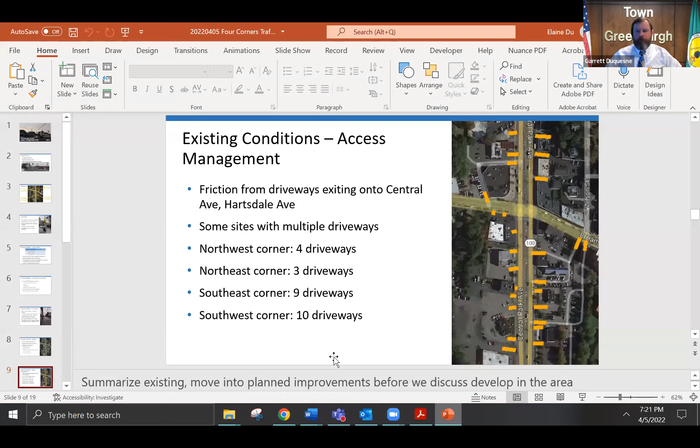Garrett, just a question. If the public emails planning@greenburghny.com or publiccomment@greenburghny.com, will you be able to see those both? Yes, indeed. Both are fine. All right. Thank you, Garrett.

Please let me know when you can see my screen and if it's in presentation mode. All set. Great.

Good evening, everyone. Tonight I'll be presenting the traffic and transportation portions of the Hartsdale Four Corners study. My name is Elaine Du, and I'm a technical director for AKRF.

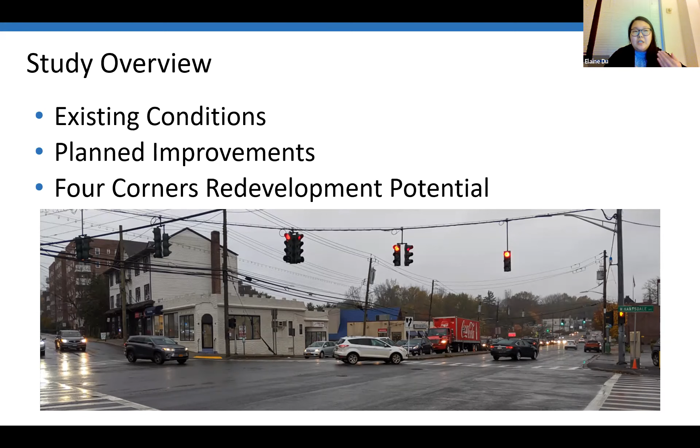In terms of what we'll go through today, we'll first discuss existing conditions, including what's going on at Four Corners today in terms of traffic and pedestrian conditions. We'll talk through the planned improvements that New York State DOT and the town of Greenburgh have planned for the Four Corners area. Finally, we'll discuss the Four Corners redevelopment potential with all of these improvements, including an initial, theoretical redevelopment scenario.

This is the study area we'll be reviewing tonight, which AKRF has reviewed for traffic. Our main study location is the Four Corners intersection of Hartsdale Avenue and Central Avenue. The redevelopment parcels we'll talk about are the northwest corner, the former Duane Reade site; the northeast corner, with the Gyro restaurant, Unico, and a Japanese supermarket; the southeast corner, with IHOP and other restaurants and fitness equipment; and the southwest corner, from Dairy Del down to the Safavieh furniture store.

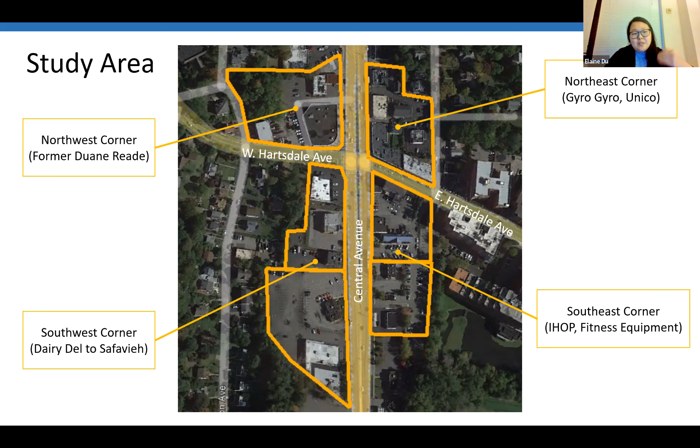The way we started this project was through extensive data collection, collaborating closely with the town. We were out there ourselves in fall of 2019 doing observations and collecting traffic and pedestrian data at Four Corners. In January 2021, we did a site visit with the town of Greenburgh to walk the East Hartsdale corridor, observing conditions and discussing the different traffic signals along the corridor. We also reviewed the Hartsdale Neighbors Association comments issued to the town, and coordinated extensively with the Greenburgh Police Department. Through all of this, we identified various pedestrian and traffic deficiencies, which we'll discuss.

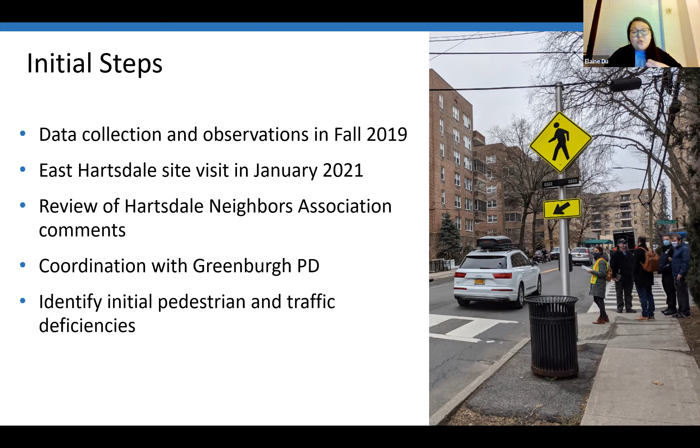To perform traffic analysis, we applied a software called Synchro 10. We use this as a standard traffic analysis software that applies a national standard called the Highway Capacity Manual. Based on various inputs, including traffic volumes, pedestrian volumes, and signal timings, it gives us outputs such as delay and level of service.

Level of service is a measure of how well an intersection operates. It's like a school grade, where A is the best and F is terrible. Level of service A is like free flow conditions—you generally arrive on green and pass through immediately. Clearly, Four Corners does not operate this way today. Right now, it's operating closer to level of service E, meaning you'll experience traffic backups and cycle failure, where you wait at a signal for a cycle or two to pass through. So we know it's not operating very well.

The unique parts of this intersection are that there are a lot of pedestrians crossing here, and it's subject to various Metro North peak hour surges with trains coming in and commuters passing through. As a result, we see significant queues and delays. In the eastbound direction, West Hartsdale, the queue has been observed extending past Washington Avenue and even to Hillcrest Road. In the westbound direction, East Hartsdale Avenue, the queue can extend past Wilson Street and sometimes to Columbia. In the northbound direction, the left turn queue spills back pretty far, sometimes all the way to the BP gas station to the south.

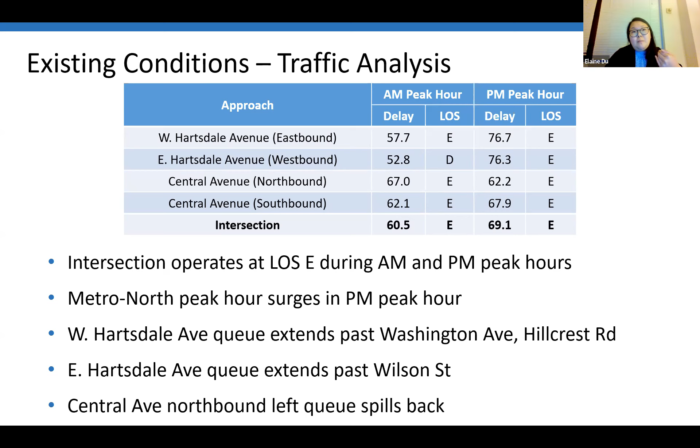In addition, we looked at safety at the intersection, analyzing the crash history at Four Corners. We reviewed a 3-year period of crash data, from 2016 through 2018. During this time, 96 total crashes occurred at the intersection, equivalent to about 32 crashes a year. Out of all these crashes, 31 injuries occurred, including 8 serious injuries. We noted that the crashes were primarily rear-end and left-turn crashes.

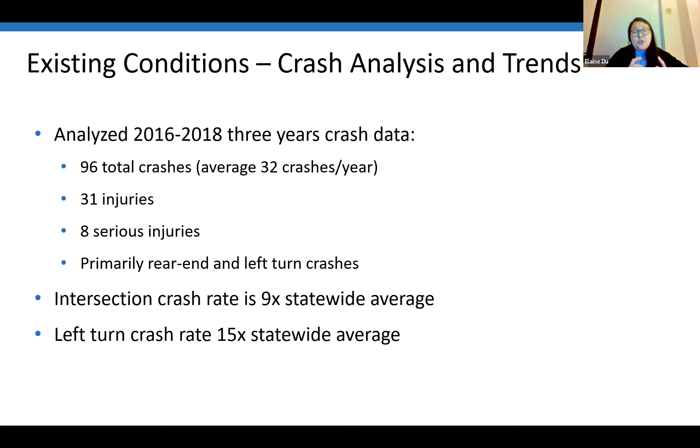These are primarily attributed to things like delay. One thing we noted was that the traffic conditions and backups at Four Corners could potentially be leading to these safety deficiencies. The intersection crash rate was 9 times the statewide average for a similar intersection, and the left-turn crash rate was 15 times the statewide average compared to a similar intersection.

In terms of pedestrians, there is an exclusive pedestrian phase that pedestrians actuate by pressing a button and then crossing. This is when all vehicles are stopped to allow pedestrians to cross any crosswalk. Especially during peak hours, because there are so many pedestrians and commuters at the intersection, this exclusive pedestrian phase is activated for most of the peak hour.

Some pedestrians cross without the walk signal, which is something we observed when we were out there, but it varies. This exclusive pedestrian phase does take up time from the intersection and may be detracting from traffic conditions. However, based on our conversations with the town and New York State DOT, we do not recommend removing this exclusive pedestrian phase, particularly because we want to maintain a level of pedestrian safety.

We also noted various conditions such as narrow sidewalks along East Hartsdale, which you'll see on the right-hand side - that is the north side of East Hartsdale. Although it's compliant with ADA, it's still narrow and not what we would want for a walkable, transit-oriented development.

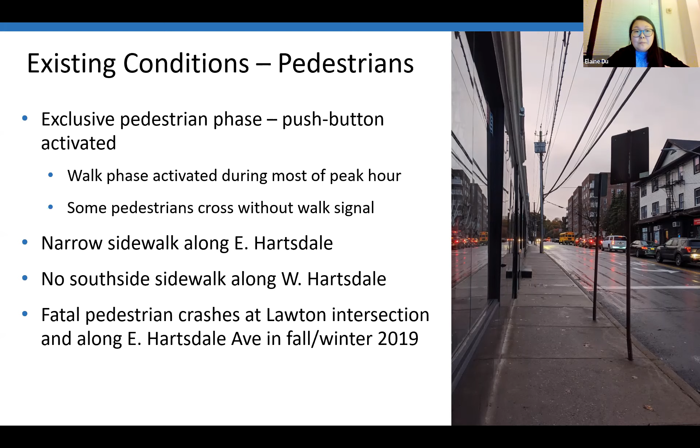However, these spaces would not be able to support a level of growth that the town wants to see for Four Corners.

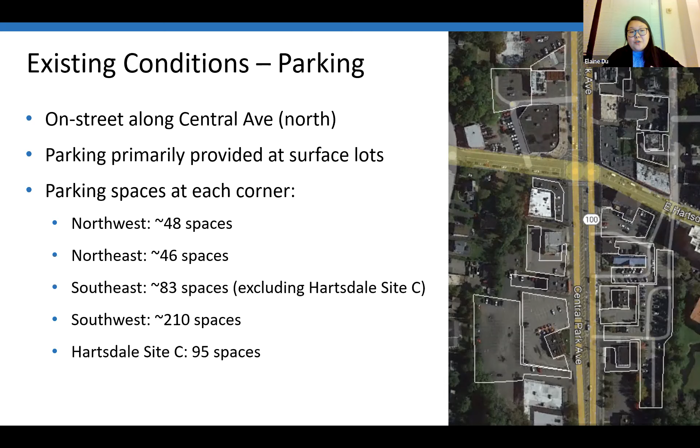Because there are so many driveways, and so many close to the intersection, vehicles will experience friction from these driveways that exit onto Central Avenue and Hartsdale Avenue, which can lead to safety deficiencies as well as traffic operational issues.

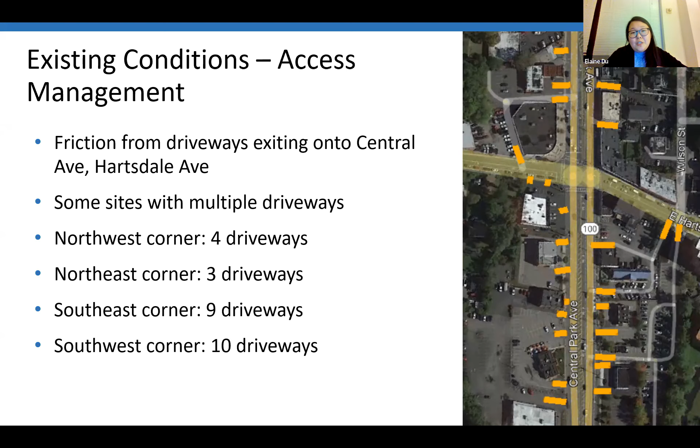So from this, we've talked through the traffic conditions and that we know Four Corners does not operate well today. We've talked through safety, and that the traffic operations of Four Corners and various geometric deficiencies could potentially be contributing to safety issues at Four Corners. We've also talked about pedestrian issues, parking, and access management.

From all this, we build into planned improvements - what the town and DOT want to do to improve Four Corners, even without development in the area. As Garrett already mentioned, New York State DOT has various improvements planned for this area, including traffic signal upgrades. They're adding new detection, which will make the intersection operation more reliable.

We understand that a few years ago, the West Hartsdale loop detector failed in the past, which led to backups and various traffic issues, so with detection upgrades this is less likely to happen. There are also signage improvements for the intersection, which will make it easier for drivers to pass through, and various pedestrian improvements such as curb extensions and ramp improvements that will better allow pedestrians to travel to and from Four Corners.

In addition, New York State DOT is planning to relocate the northbound Beeline bus to the far side of Central Avenue. The bus stop currently is right here, and New York State DOT plans to relocate it north to here.

In addition to what DOT has planned, the town of Greenburgh also has a HAWK signal planned for Lawton Avenue. A hawk signal is a pedestrian hybrid beacon, a traffic signal that's really just for pedestrians. A pedestrian would push a button, it would change from green to red and stop all traffic for people to cross, really improving pedestrian safety for this area.

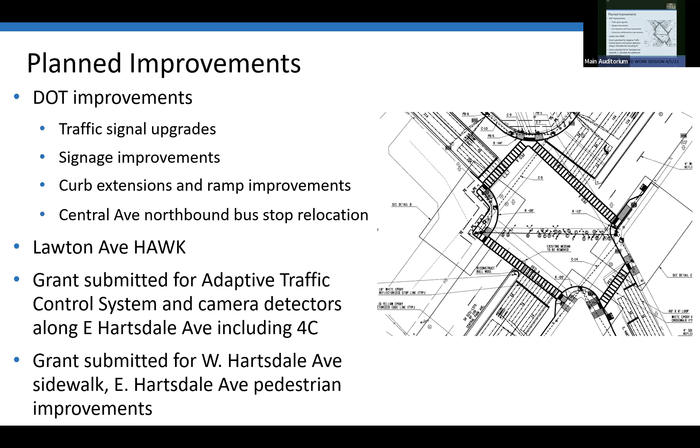I don't disagree. Could I suggest we hear the presentation first, because a lot of people are watching this, and if we're going to send it to the state or anybody else, it would be helpful to get it all on the record tonight.

It looks like there are federal funding opportunities that might be applicable as well. Megan had sent out the email.

Another idea was adding a turn pocket on East Hartsdale Avenue, which isn't feasible today since there's existing development there. In that case, redevelopment would be able to provide this opportunity.

However, we're not certain if a developer would have the appetite to do this, so to be conservative, we didn't include this westbound turn pocket from East Hartsdale Avenue in our analysis — just to be conservative and model what is possible.

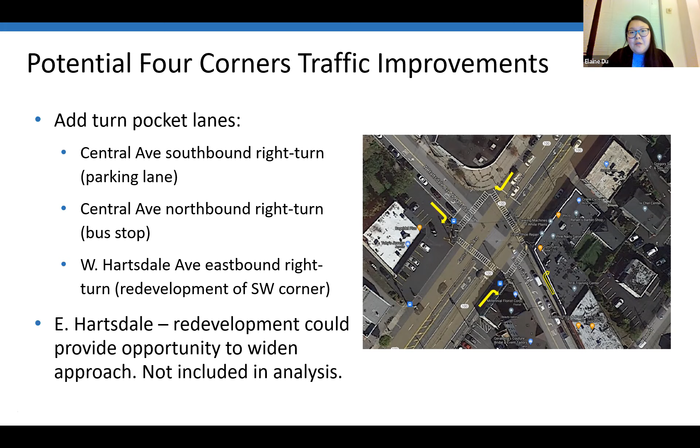To examine the redevelopment potential, going through the process from the beginning, we collected a lot of data and collaborated extensively with the town and various stakeholders. We reviewed existing conditions for traffic, pedestrians, parking, and access management.

We looked at what's happening at Four Corners in the background, as well as what we could do to improve traffic so that development could occur here.

From there we developed an initial development scenario — we won't present this today — which was the maximum possible development in line with the zoning code. From there, we ran several iterations and analysis for various scenarios.

We got to a point where we developed this final theoretical development scenario. I don't want to call it final, because a developer could still come in and change things, but it's a scenario with an acceptable level of development to the town while still maintaining traffic conditions comparable to or better than today.

The theoretical development scenario includes approximately 450 dwelling units across all parcels, and approximately 60,000 square feet of commercial, retail, restaurant, and office space, through all of these corners. We split up the south corners, which are pretty large.

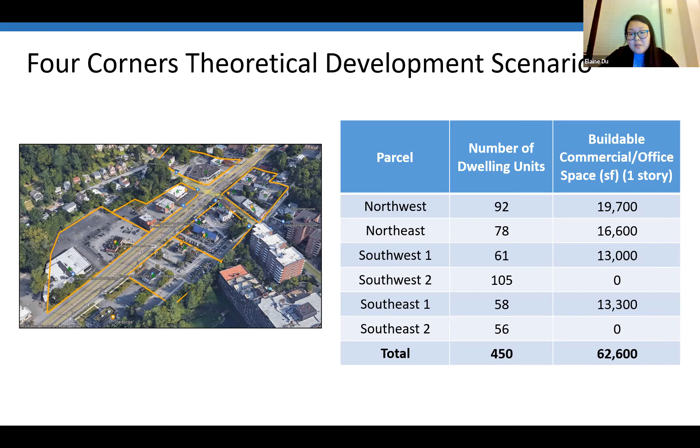This is just to show you what our theoretical development scenario is in terms of how much development there is. To summarize, it's approximately 450 residential units, 60,000 square feet of commercial, retail, office space, and this would equate to approximately 4 stories.

We took this development scenario, estimated how many trips could be generated through this redevelopment, and added it to our traffic network. From this, we were able to get results, which include the improvements we discussed before: the turn pockets, the adaptive traffic control signal system, and all these improvements.

On the left-hand side here are the existing conditions we discussed before, where everything is operating at a level of service E, which is not great. However, with the theoretical development scenario and all of these improvements, we were able to experience some level of improvement at the intersection. We're operating at a level of service D in the AM peak hour, which is acceptable for downtown, central business district locations. In the PM peak hour, although we still operate at level of service E, it's better than what we have out there today.

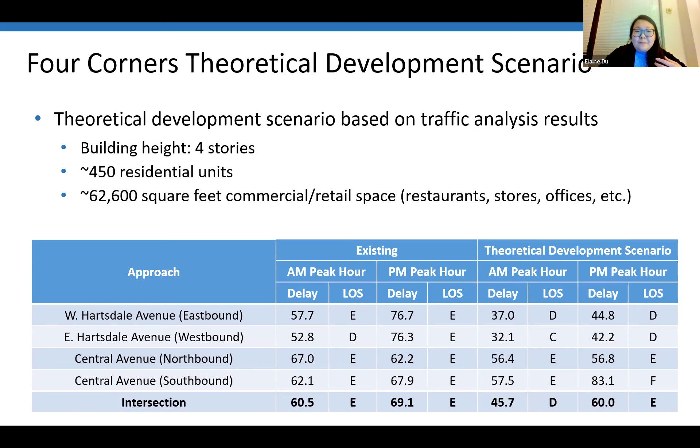In terms of parking, we understand that in order to better serve what's going to be out there in Four Corners, there needs to be more parking to support all of the residential and commercial development. So based on parking requirements that are supportive of transit-oriented developments, we were able to develop a general parking requirement for each of these corners.

It totals to approximately 900 spaces. What we envision is multi-level parking garages that are consolidated for each corner. These parking garages would not be viewable from street level like most downtown areas. Instead, they would be screened, so you would have commercial and residential space, likely more commercial space, around these parking garages. You access them from the back, and out front where you walk on the sidewalk, all you see are the stores.

The other idea we had is that we need to maintain and potentially expand the Hartsdale Site C parking lot that is under the Hartsdale parking district, to better serve all the residents and commuters of this area. Additionally, 900 parking spaces is a lot, so some other items the town could consider are allowing various credits to reduce the parking requirements, such as shared parking credits and lowered requirements for various land uses.

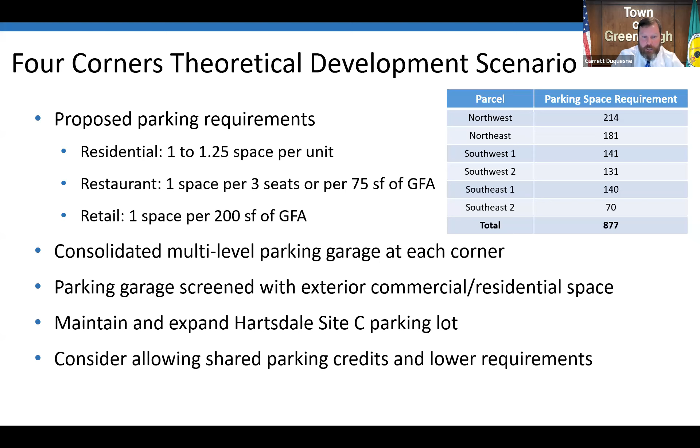I did want to note that in other municipalities we've worked with, in which developers buy public lots, we've seen them also have contracts to give a certain number of parking spaces back to the municipality. So there are options, and like Garrett said, there are different possibilities to see what the developers envision.

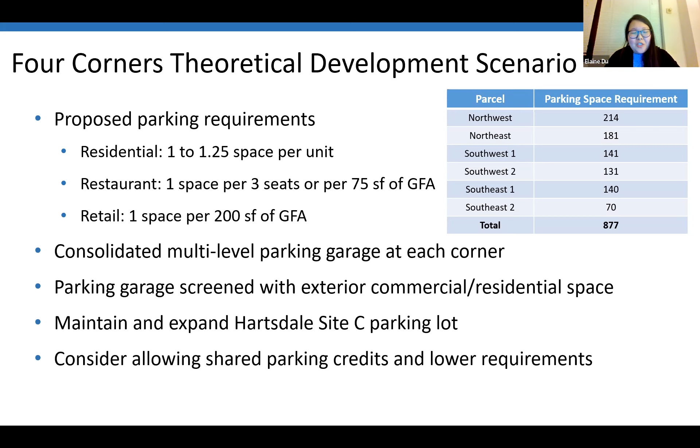So in addition to new parking lots to better support Four Corners, we also envision improving, consolidating the 20+ driveways down to only a couple of driveways. This really helps with reducing traffic friction along Central Avenue and along Hartsdale Avenue.

These driveways would be a combination of both full access driveways, which allow both left and right turns, or right in, right out driveways, which DOT is pushing more for in terms of private development.

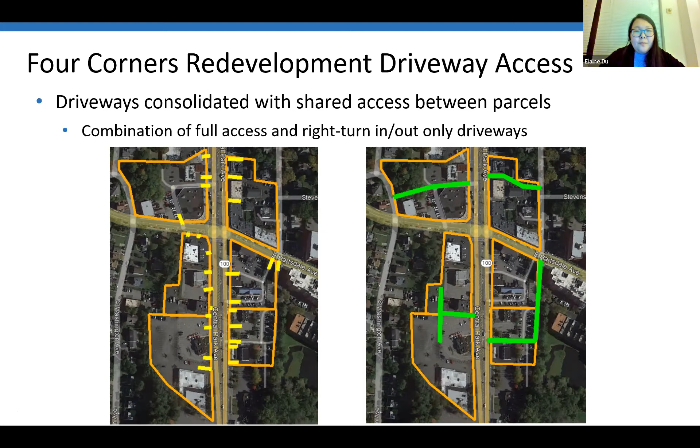Finally, we understand that there's a very strong need for safety and pedestrian improvements in the area. A few things we suggest are various signal improvements, like reflectorized backplates for all traffic signal heads. I'm sure you've seen these when driving around, whereas this is kind of a naked traffic signal. A reflectorized backplate is like a yellow plate on the back so you can see it outlines the traffic signal.

It really highlights the signal for drivers to alert them better to the signal that's there. Another idea is having lane line extensions, which are the dashed lines in the middle of an intersection to show vehicles where they need to go, and it really delineates space for particularly left turning vehicles. We've heard all the complaints from the Hartsdale Neighbors Association. Roadway lighting improvements are needed along East Hartsdale Avenue for vehicles.

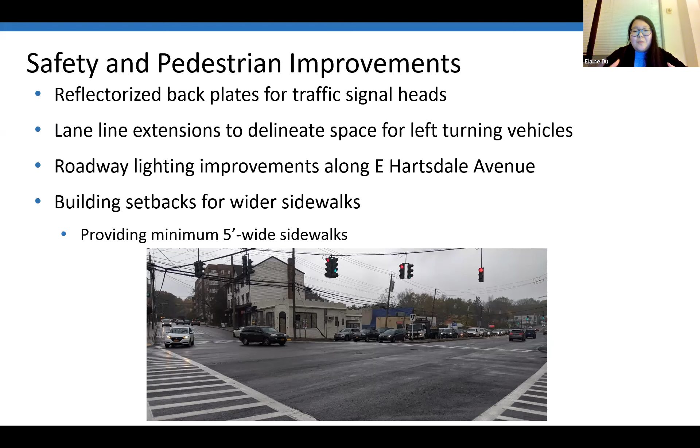In order to improve pedestrian conditions, buildings at Four Corners, the proposed redevelopment, setbacks should be pushed back in order to provide wider sidewalks for pedestrians. 5 foot wide should be the bare minimum, but 8 foot wide plus is really what we need for a better, more walkable area that is conducive to transit-oriented development. This could really help Four Corners be what it could be for the town.

At this point, I don't believe we're taking questions, but I think I'm passing it on to Justin. What I think might make sense is to turn it over to the town board for questions before we get to the stormwater component of the presentation, if there are any questions. I haven't received any questions via email from residents to date.

So all these recommendations, most of them you would recommend that we wait until it's redeveloped, and how many could be done before there's a redevelopment proposal? Yeah, that's the main thought, that these various developments could be tied into improvement to the redevelopment in the area. So like I mentioned before, each corner would be responsible for their own set of improvements, but I'm sure Garrett could elaborate further.

So the types of improvements that really are challenging to make now are things like driveway consolidations. There's really minimal scenario where a driveway consolidation can happen at present. I do believe the turn lanes, I don't see the motivation of a private property owner to make them at this time.

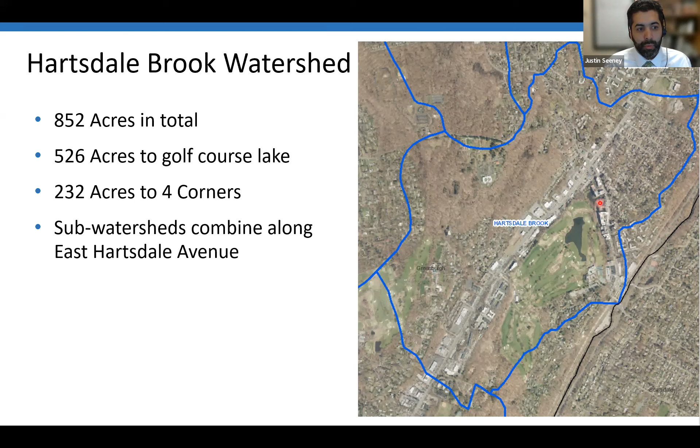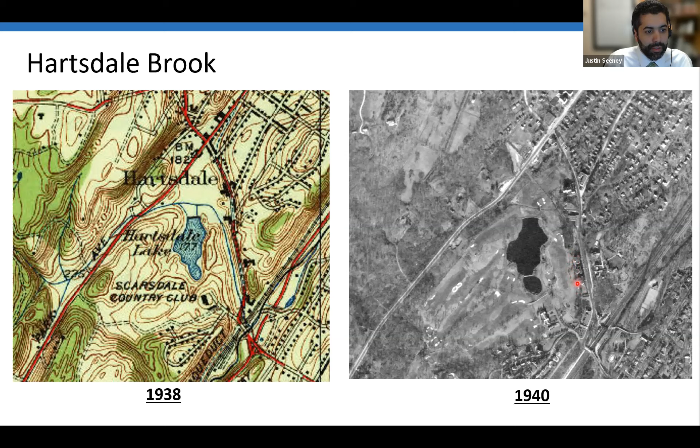By the middle of the 1900s, you start to see legs of that stream disappear. You start to see the first buildings pop up here on East Hartsdale Avenue. The stream was still an open channel at that point. You can still see the remnants of that open channel in the rear yards of these three buildings. And then by the 60s or 70s, both from an aerial standpoint and from the USGS standpoint, you can see that stream disappear from the map. That's combined with significant development that has happened along East Hartsdale Avenue.

And like we'll talk about in a minute, pretty extensive culverting and burying of that stream in pipes, which are quite frankly just substandard.

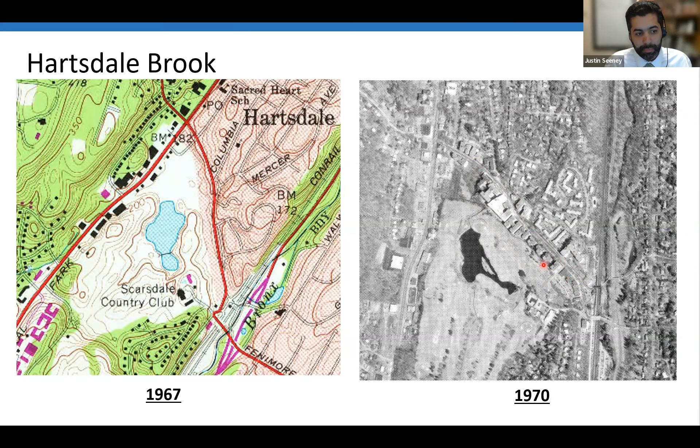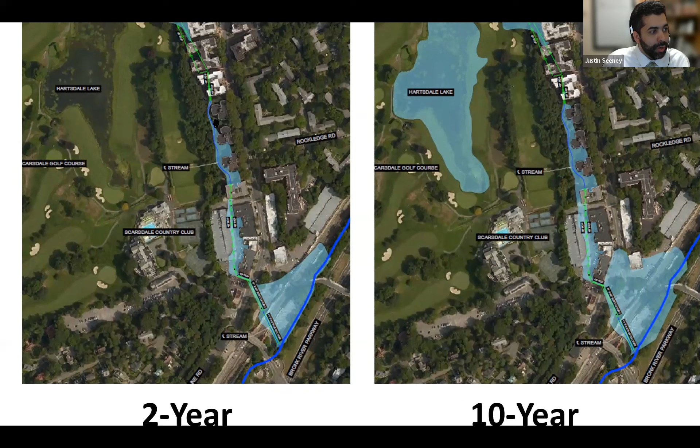In addition, we've tried to calibrate this analysis with input from the communities and property owners in these areas. What we're seeing in our model, backup behind these buildings on East Hartsdale and in the rears of these other East Hartsdale buildings, is very much consistent with the lived experience of these property owners.

So to that end, we recognize there's a need to address conveyance. If we go back to that pinch point analogy, we're at a very small amount of capacity given the flow that we're experiencing.

To solve that 100-year event, to solve that ultimate storm on the scope of Ida, is quite an undertaking, and I'll show you some slides on what that looks like in a minute.

In the interim, there are opportunities that can really provide relief for this 2-year storm event, which is about 3.5 inches in a 24-hour period. Just for some relative perspective, in many years 3.5 inches would be the most rainfall that fell in a 24-hour period for the year. In other years, it's dwarfed by larger storms, much like in 2021 or 2007.

But the aim here is that we are providing options that can provide some amount of relief for those 2-year events, so these frequent instances of inundation can be lessened in frequency, while acknowledging that those solutions do not eliminate vulnerability to larger events. The only way to get there is with a much bigger fix.

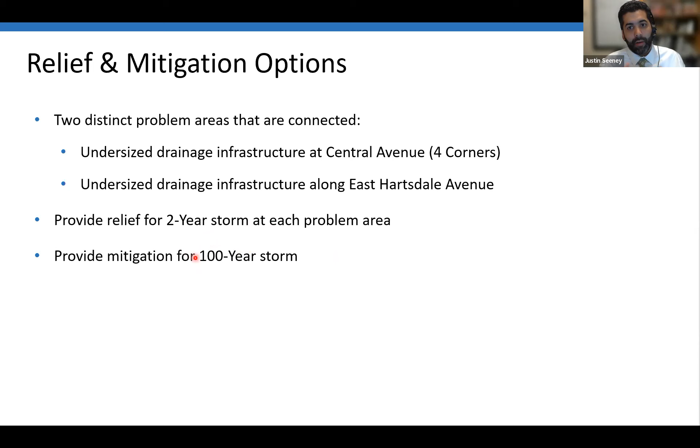So looking at this in stages: Central Avenue, at Four Corners, Fountain Diner, Starbucks, and the furniture store. The 2-year flow of that 200 or so acres is about 200 CFS, and the existing capacity of the system is about half that.

The other challenge we're dealing with here is a topographical one. From an elevation standpoint, this elevation is at about 176. The water level in the golf course pond is around 176. The water level down by the parking garage on the eastern side of East Hartsdale is around 176. So there's very little topography to bridge the water course from point A to point B.

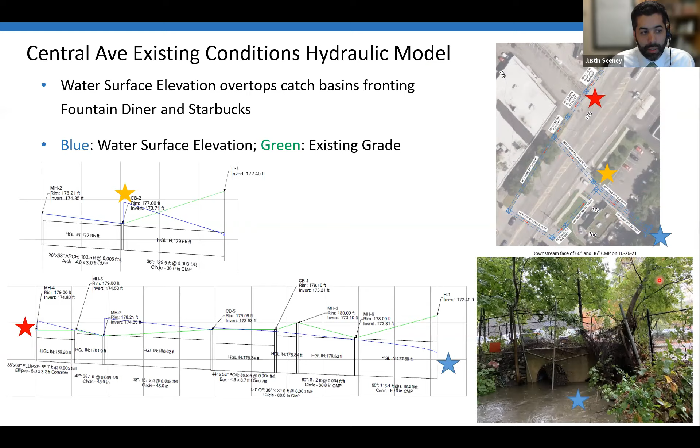So the first solution to address that, from a stormwater standpoint, is relatively small, but again, 3.5 inches in a 24-hour period is still quite an event.

A series of box culverts in that similar alignment could convey that stormwater and get it out of the Four Corners intersection. The pro to this is that it's an improvement that can be readily enacted to provide real-time relief for these frequent events. The con, as I've said, is that even with this solution, those larger storm events still present levels of vulnerability.

What's the cost of that? The order of magnitude - and again, we've done only very conceptual level designs for this - but the order of magnitude was around the $4 or $5 million range, I believe. For option one, this would be the temporary fix at $4 million.

Say that one more time. I'm saying this 2-year relief effort that you said isn't really going to solve the problem - that's a $4 or $5 million budget item. Correct. It's still a considerable amount of work. It's quite a bit of infrastructure, but we are also dealing with quite a bit of flow.

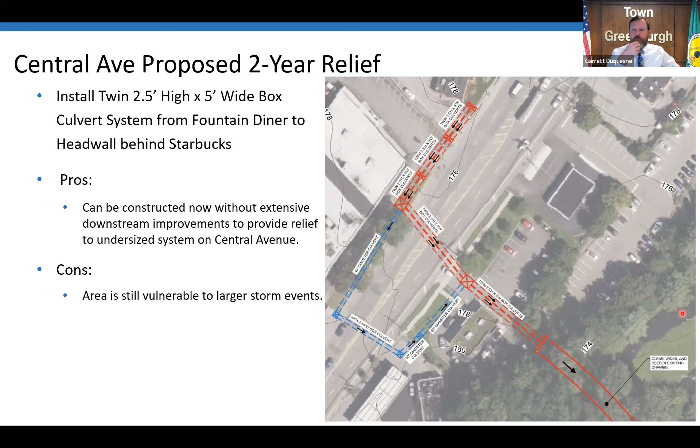So again, we ran this scenario through the modeling software, and ultimately what you start to see - that blue line representing that water surface elevation - is kind of safe conveyance of that 2-year storm event, obviously providing a benefit as compared to existing conditions for those larger year storm events.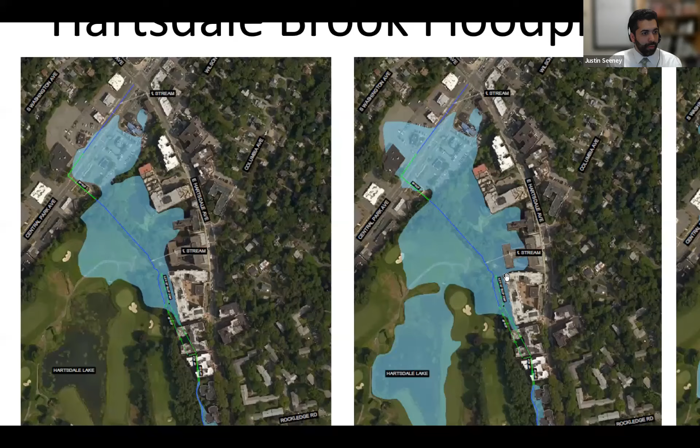Part of the reason we looked at that 2-year storm event as the baseline - and I'm just going to slide back a few slides, I apologize - is in this 10-year storm, which is on the right, the backup that happens here at Four Corners is more really a function of that pinch point. So there's very little you could do here at Four Corners to get the water out without doing extensive downstream improvements to this infrastructure behind the buildings. You could put 6 barrels of pipes in instead of 2, and the driving factor would be that backup of the flow from the pinch point here.

So that's why the 2 years. It seems to me that we have to address the garbage and debris that's collected in these culverts as well - we can't just say that garbage and debris irrespective, the pipes are too small. So have you been able to ascertain to what degree the garbage and debris currently clogging these pipes exacerbates the damage? Yes, I mean, we know that...

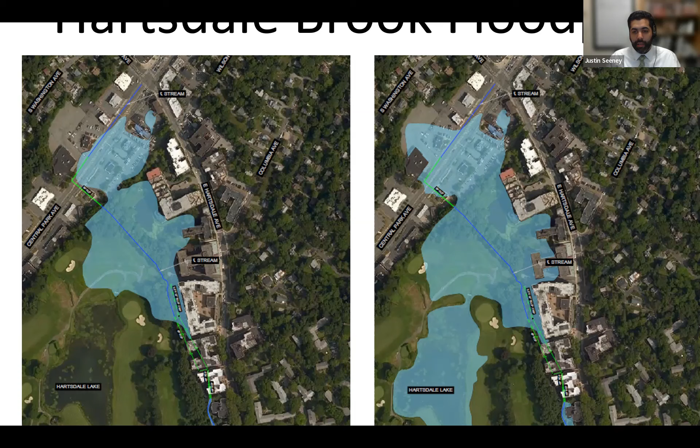We've done an extensive amount of TV inspecting of these different lines, in tandem with some of the Central Ave sidewalk work that has happened in recent months, and have been able to observe blockages and debris.

The analyses that we've completed are all kind of assuming that the pipes are clean and clear as a baseline, because that's a reasonable point to get to. And alongside Rich Fond from DPW and Garrett, we've all had discussions about the best framework to enact maintenance of these lines to ensure that they are clean and clear, both from the property owner standpoint and from DOT.

So we're aware of the blockages. We're aware of some corrective actions that have been taken over the course of the last several years. I know there's a concrete blockage down here at the parking authority. I know there's a pipe here crossing Central Avenue that was pretty extensively clogged. So it's slowly being addressed. But I think the framework for continued maintenance of those is just as important as any design solution.

But is it fair to say that one should begin by cleaning everything out? Yes. Okay. So again, this solution would provide for that.

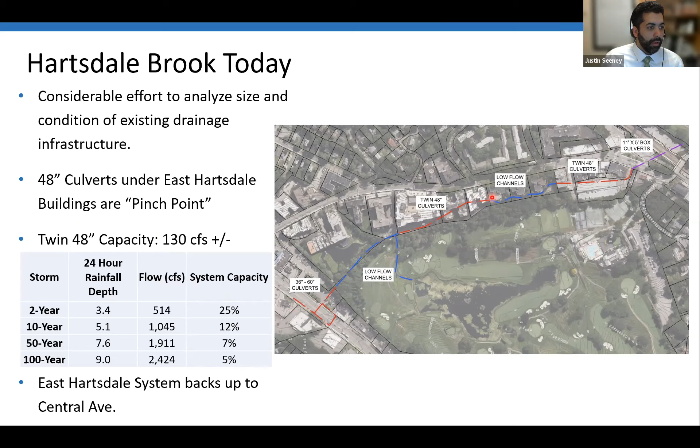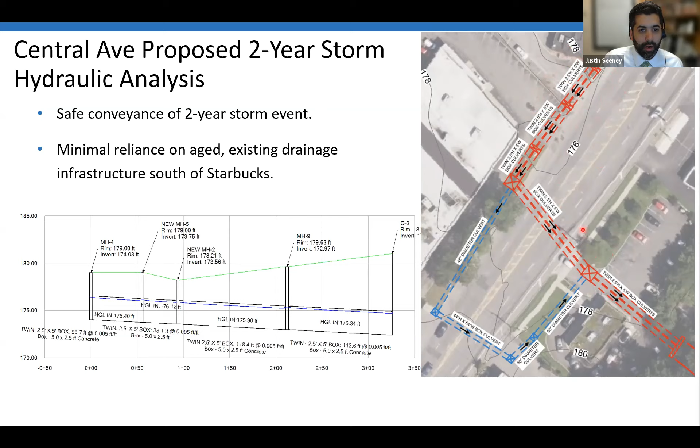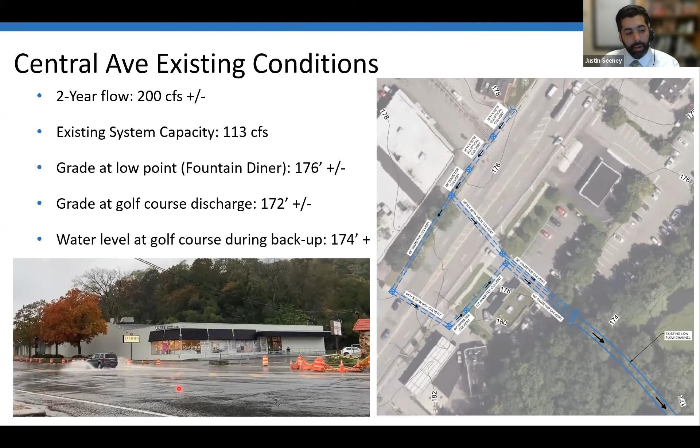So again, there are two distinct areas that have issues. One is Central Avenue and the other is East Hartsdale. They are very much connected, but we've kind of viewed them as solutions to provide relief during that 2-year storm for each of those different cells, that could be enacted independent of each other, but could also be enacted together to provide a greater comprehensive relief for the 2-year storm.

So again, about 500 acres drains to this lake here, or Hartsdale Lake. It's really just a kind of a pond here on the golf course property. It's got an existing outlet structure here that kind of meters or controls the amount of flow that can leave the pond.

It's got a valve so it can be adjusted, and we understand the golf course does take proactive steps to drain the pond down in advance of storm events to provide some storage. All of that flow converges at these twin 48-inch culverts and low flow channels that run behind and under the East Hartsdale buildings.

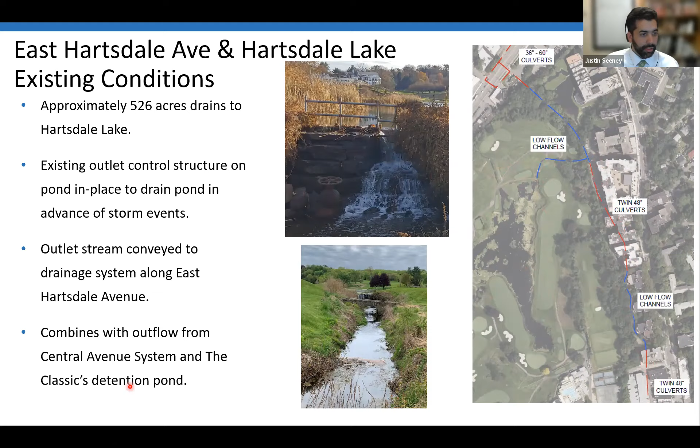So the proposal here would be to use that pond for some amount of flood storage. The pond, quite frankly, for like a 100-year storm, just does not have the square footage or volume to provide real appreciable benefits in these large storm events. It's about 5 acres compared to the 500 acres it collects. That ratio just isn't there to provide meaningful detention or retention for the 100-year event.

With that said, there are mechanisms, processes, or improvements that can be put in place to help provide relief for that 2-year event, the more frequent storm that does provide impact and damage to the residences on East Hartsdale Avenue. So what's the cost of that?

That's going to be highly variable. It could be as low as a few million, and it could be north of 10 million. That will really depend on what the disposal cost and disposal approach is for material dredged from the lake. That is the number one driver in this approach.

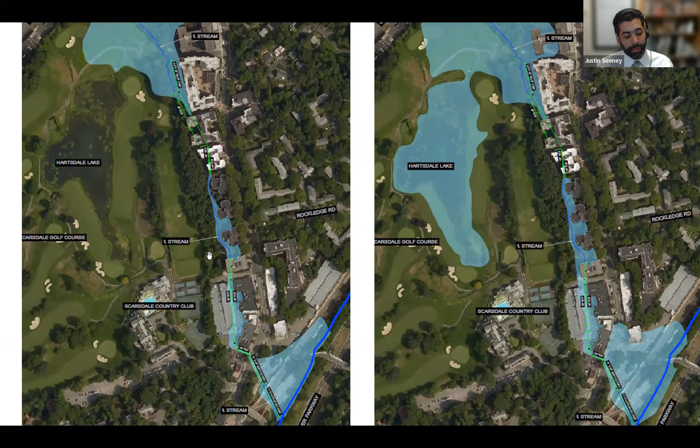If I bring this slide back up to show what we're seeing in the model: close to 18-inch to 2-foot reductions in inundation here. So while these pipes under existing conditions could remain surcharged, the extent to which they cause flooding and inundation in that 2-year event, specifically in this area of East Hartsdale residences, is appreciable.

Like, if we did this option during the hurricane, I guess Ida, there were a lot of apartments and a lot of cars that were lost and some restaurants went out. Would this effort have significantly reduced that from happening with the storm we just had last year? Probably not, quite frankly. Yeah, just to be frank with you, probably not, right?

And part of that is Ida was a 100-year storm, right? I think the term I've heard quite a bit is that we get a 100-year storm every year now, and that's a little bit of hyperbole from a stormwater standpoint. Ida was the real deal, for lack of a better word. It was 8 to 9 inches of rainfall.

From a stormwater standpoint, we look at the amount of rainfall in a 24-hour period. Ida was an anomaly in that it dropped an extreme amount of rainfall in a very short period of time. I believe we got 3 inches in an hour. Yes, and I know that Garrett had at one point.

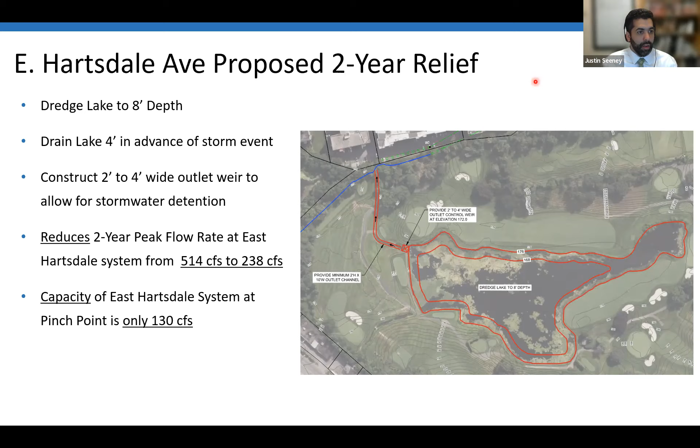These first two we've walked through are to relieve that annual or every couple of years ponding and inundation that happens in these areas of both Four Corners and the East Hartsdale system. At that point, even with these enacted, storms like Ida - I don't want to say once in a lifetime events, because that's not the case - but storms like Ida require a much more robust solution, which we'll get into now.

I just have one other question about the East Hartsdale Avenue option for the 2-year storm you've been talking about, and the $10 million fix. Right now, for those types of storms, do some businesses temporarily go out of business because of the flooding? Or are you talking about significant damage that has caused closures of business and property damages, loss of cars, etc.?

I think that's something we still need to calibrate a little bit better. Quite frankly, I know that we do have instances of backup and impacts to the flooding of that area. The extent to which those impacts drive property damage is something we're in the process of working through.

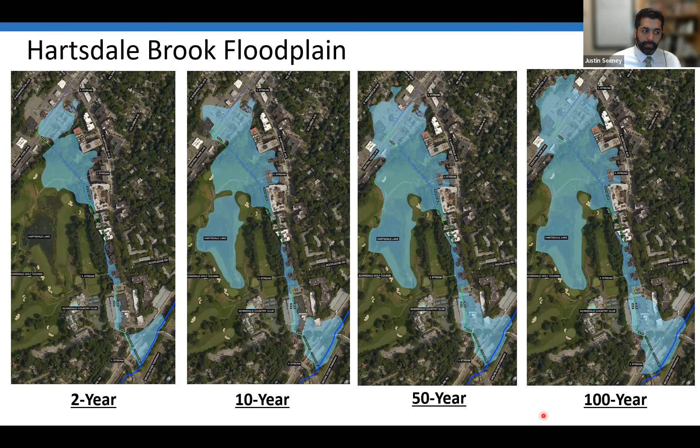So with that, just to put a bow on the 2-year pond dredging solution - again, the pros are very similar to Central Avenue. Quick implementation and real results soon, that don't rely on extensive downstream improvements. This is a regulated water course, so there will be a permitting hurdle to cross. And like I said before, it doesn't fix the problem in East Hartsdale, it just lessens the load on it.

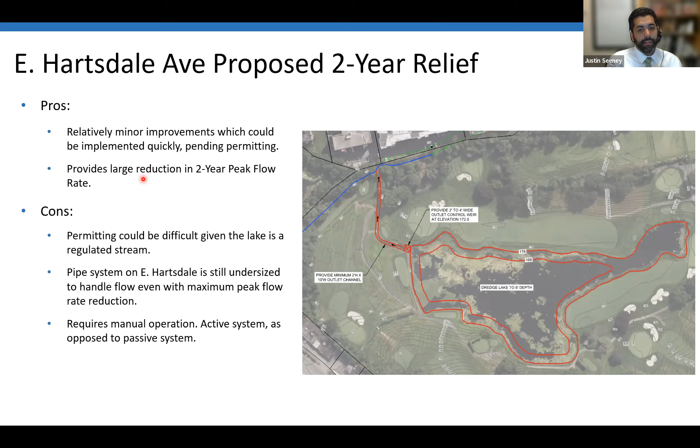So for the 2-year storm, we really have to find out what you mean by lessen. I'd like to see the extent of the property damage from a 2-year storm. Because if it's really just addressing some puddles, something that's not that significant, it's not worth spending $10 million on it.

Understood. And refining what that number is, right? Is it 10 or is it 2 or 3? It's just going to be so driven by what it takes to add more storage to this pond, which is driven by field data that still needs to be collected.

So for the 100-year storm, it involves a similar approach to installing box culverts here on Central Avenue, just bigger and a little deeper. That elevation constraint that exists under existing conditions can be finessed once you do a more comprehensive solution. So where I was saying you go very wide and shallow, if you combine Central Ave improvements with downstream improvements, there are opportunities to go much deeper and get much more capacity.

So it's a similar solution to that 2-year solution, just about twice as tall and twice as wide. A series of channels that would work through the golf course property, alongside the buildings. I'll walk through each of these legs, and then culverts again through East Hartsdale.

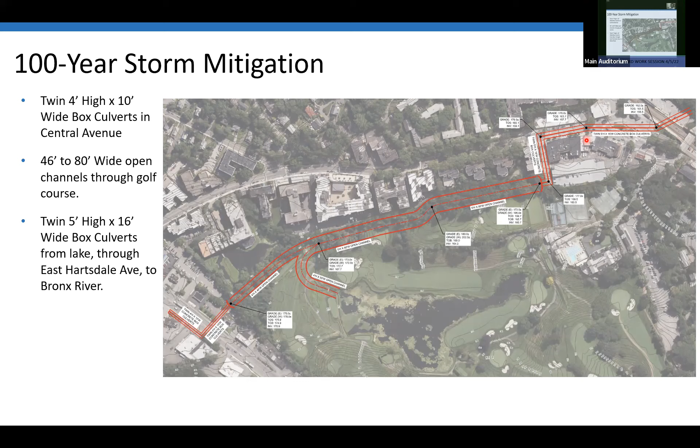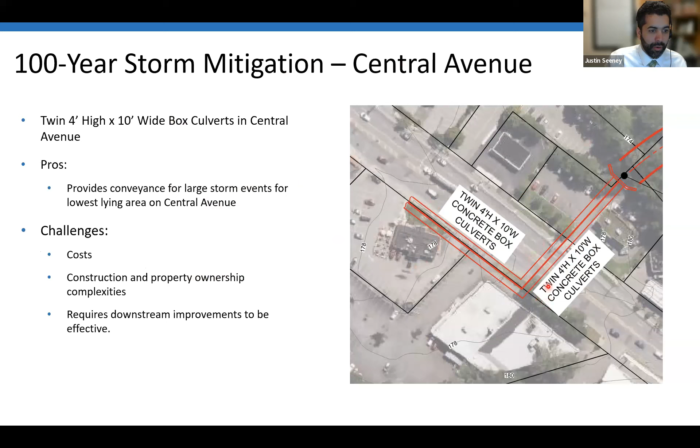I know we're running long, so I'll get through this, but again, similar proposal: large box culverts in Central Avenue, followed by an open channel. We're modeling this very much as a trapezoidal system. Through a refined design approach, there are ways to dress this up, make it potentially more ecologically friendly, and to the extent it can be an amenity. But strictly from a hydraulic standpoint, we're looking at channels on the order of 46 to 80 feet wide at the top.

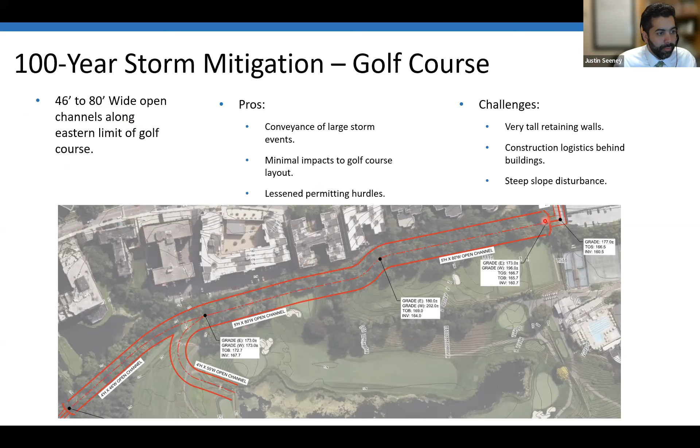Running alongside the eastern edge of the golf course, and similarly a series of very large box culverts would run through this section of East Hartsdale Avenue. The biggest challenge there is all of the existing utilities in the street that would have to be accommodated around this.

Not a small undertaking, but to board member Sheehan's point, not a small problem to address either.

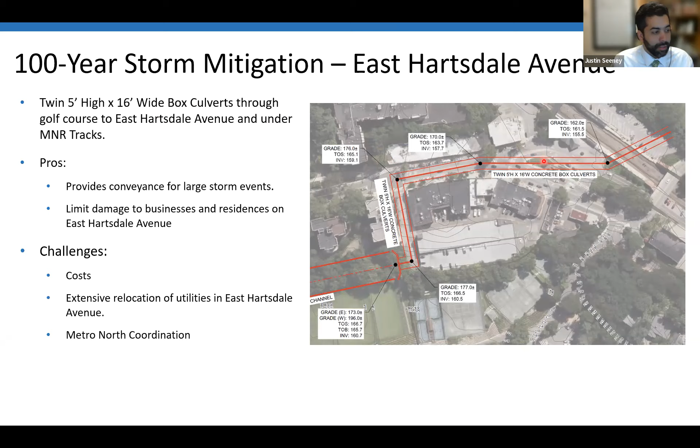I'd mentioned a couple of alternatives that were left on the cutting room floor. We looked at another alternate that would have rerouted that water course through what is now the golf course pond to another set of culverts in a similar scenario. From a practicality standpoint, this would blow up the central feature of that golf course, and it's probably not all that feasible from a practical partnership standpoint, but we did look at other ways to get that water from point A to point B.

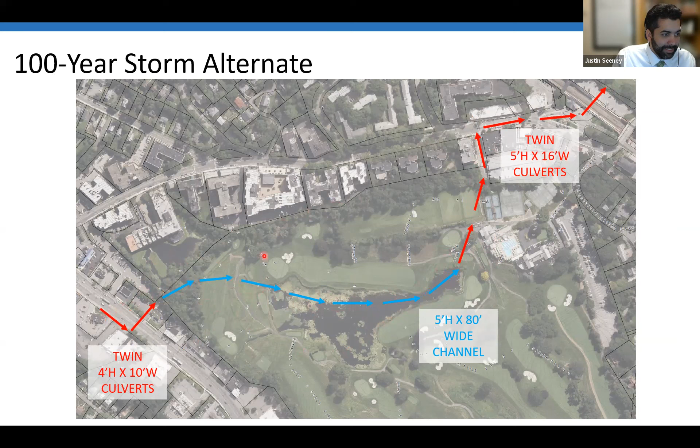And then we looked at a 10-year solution. This is a scenario where maybe this isn't an open channel, and the real benefit of this solution is that you could potentially avoid some of that extensive utility disruption to East Hartsdale, and you could potentially squeeze it back here, or build it into the program of a mixed use or redevelopment of these parcels.

But in any case, this shows that once you start ripping into this slope and cutting through the golf course and doing Central Avenue, and still be vulnerable to a 100-year event, is where we landed on the 2 to 100-year storm. While it's a major gap, solving anything bigger than the 2-year storm becomes such an expense that it really becomes prudent to just look up a level.

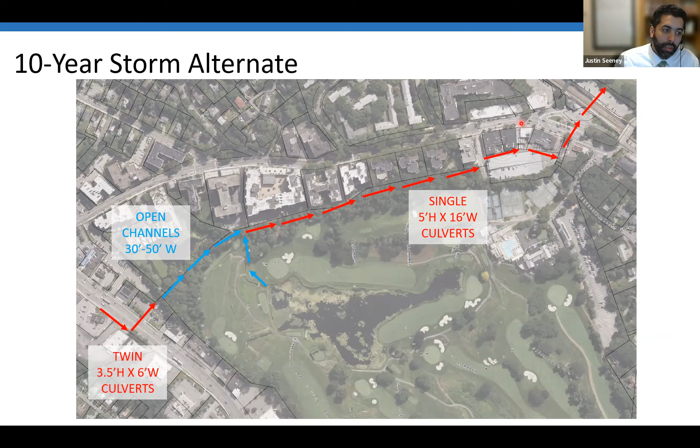And then just at a very high level in the near term, what Garrett and I did hear from several property owners during IDA - so we got some good news and some bad news, actually.

The good news was the folks that implemented flood doors - I believe they're the property right here, Garrett, correct me if I'm wrong - but folks that implemented flood doors in the rear of their property saw real success from those flood doors in keeping that water out from breaching the ground floor. That's an example of a strategy that could be implemented or repeated elsewhere for property owners experiencing similar issues.

The other thing we heard was that some of the flooding, especially in cellar spaces during IDA, was actually driven by backup, whether from floor drains or possibly toilets, but at the very least floor drains. So installing backwater valves on those drains - those connections to the storm sewers, or if it's sanitary - is another kind of low-hanging fruit that could be implemented to address some of these property damage issues we're seeing now, in the interim of any of these larger scale solutions that will take time for design, funding, and construction.

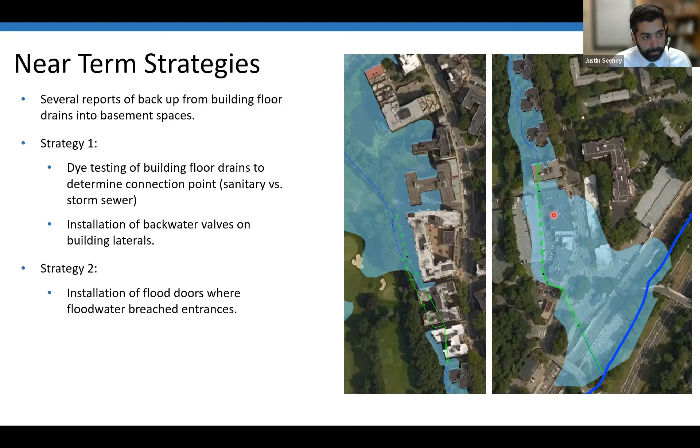So that's the conclusion of our presentation. Again, the big takeaway here is the 100-year storm solution is by no means a simple fix. There are things that can be done in the near term to provide relief. To Supervisor Feiner's point, quantifying that damage associated with the 2-year event will be critical in understanding the real merit of those solutions. But both from an existing conditions inventorying standpoint and starting to devise real solutions to move forward, I think we're at a good point right now to start pursuing grants.

In terms of - I'm not sure if this would be a question for you - but if there's underground water, and we're looking at redeveloping the four corners, how would we have to resolve the underground water so that the foundations of the buildings could be built, right?

Yeah, and I think redevelopment in itself will aid in that. Newer developments in many municipalities - White Plains, we represent Port Chester, so on behalf of Port Chester - require that new developments don't discharge groundwater to the storm sewers. So if you have a subsurface cellar or a subsurface parking garage, those structures are built watertight to resist any groundwater and keep it away from the storm sewer.